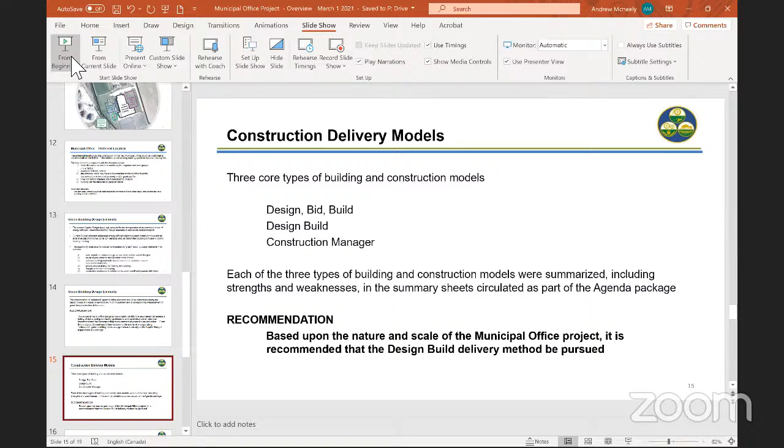All right, thank you, Madam Mayor, members of council. Tonight, I would like to walk through some aspects associated with the Municipal Civic project. This builds on the information that we shared in August of 2020 as part of our continuing review of options and their potential implications as a go-forward related to this initiative.

So to assist everybody, just from a bit of a context perspective, the history: the township used to occupy the space at 1171 Greenfield Road, and in the mid part of 2015, the administration was moved to the North Dumfries Community Complex. Staff presently occupy several meeting and programming rooms at the NDCC. We also occupy a portable that was purchased and is now located in the west parking lot.

Back in 2015, when the move was first announced to the NDCC, it was identified as an interim and temporary move to allow the township an opportunity to gauge its financial resources and to assess some options as it related to a future municipal office.

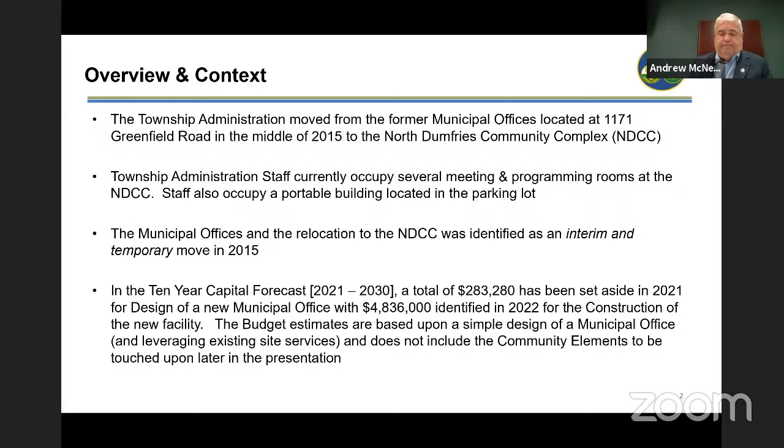Township today has a population of approximately 11,200 persons. By 2031, as set out in our official plan, the population for the township is proposed to increase to a size of approximately 16,000 persons.

So the Municipal Civic Center administrative space needs assessment, and the associated space allocation—in other words, how much square footage is required to accommodate administrative aspects—is based on the 2031 population as targeted in the township's official plan.

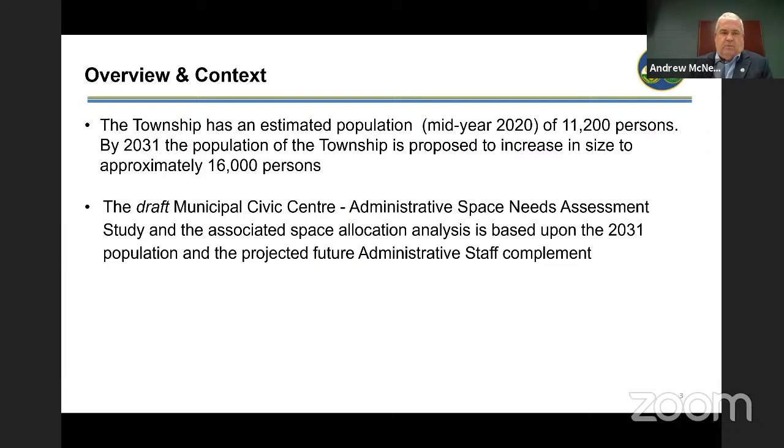Some of the key elements we're going to touch upon this evening: assessing or reviewing the alternative space allocation models, the incorporation of community space programming, the potential location for the siting of the new town hall and its fit within the overall campus of the property, green building components dealing with energy efficiency and lowering greenhouse gas emissions, alternative construction delivery models, public consultation and engagement process, and a suggested time schedule.

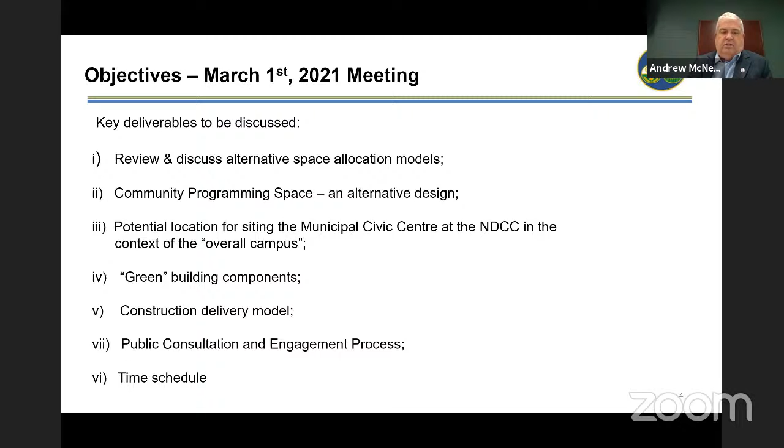So, focusing specifically on the space allocation model, circulated as background information with the agenda were two charts. The first chart looked at future needs based on staff positions in various departments and the assignment of space for each of those positions. The second page covered the back of house: washroom facilities, public washroom facilities, rooms, server room, storage space, and the like. All of these elements are broken out and listed.

And then at the sum, we have the gross up by 30%, which is the circulation in the common space for form, function, and fit activities in the building itself. So some key elements that are built into the model.

There would be a centralized customer service counter where all public-facing transactions would occur at this one-stop location. There is a dedicated office for the mayor, and there's a shared office with 2 workstations for the 4 ward councillors. The Dumfries Room, which exists in the western portion of the current NDCC, would continue to be utilized as a council chambers, a large meeting room, a training room for corporate purposes.

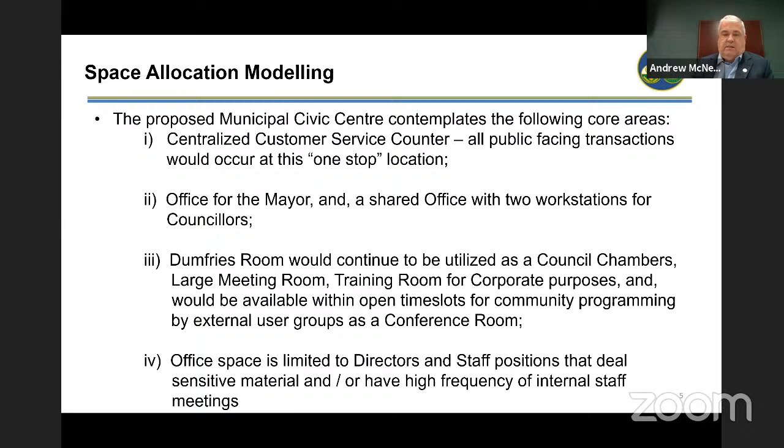The majority of the work areas for the administrative or technical staff are designed as workstations with centralized hydro, data, and telephone cabling that's dropped from the ceiling. So it's an open concept model, and the objective through this type of floor plan is multifold.

One is the overall cost of construction is somewhat lower because we don't have the demising of space with drywall partitions and doors. It also is a more simplified air conditioning, cooling network through the HVAC system, as we don't have to worry about as much confined space and the associated air exchange requirements under ASHRAE requirements.

The other benefit is it provides a lot of flexibility to create an adaptable floor plan over time. As technology or workflow patterns change in future years, having this open space allows us to readily change the footprint of the work areas more easily without having to worry about internal demolition of partition type walls.

There are 2 proposed meeting rooms, one at 6 persons, one at 12 persons in capacity, and 3 breakout rooms. Typically, these are to deal with either small internal meetings or people that come to the customer service counter when the nature of their conversation is perhaps sensitive, such as a taxation related matter, or the discussion is going to take a little bit longer than a normal transaction. This allows the discussion to occur in a smaller room where more privacy is afforded.

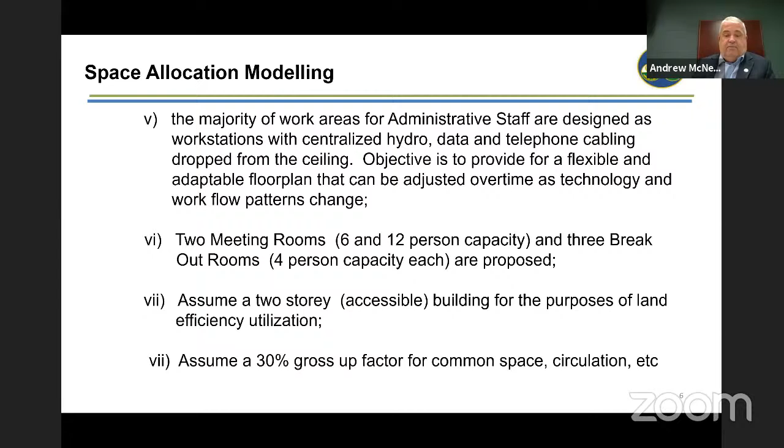We have assumed a 30% gross up factor for all common space and circulation areas. So we took the square footage for each of the business type activities noted in the space allocation model, and then gross it up by a factor of 30% to account for those common space elements.

So when we looked at the space allocation model, we also assessed what business areas of the corporation should be included in the town hall, and whether there were certain elements of the township's administration or technical staff that could be located in alternate space elsewhere in the building portfolio of the corporation. So the first area that was looked at was leisure and community services.

For the purposes of this discussion, we're just going to refer to it as recreation, and we're focusing specifically on the administrative staff. There is the option for administration staff within the recreation portfolio to occupy the current administration area that's adjacent to the front foyer or the main entrance at the NDCC. When the building was first constructed in 2011, this is where recreation admin staff did occupy, and it was intended over time that that would be the space they would occupy.

This allows for better interaction with visitors to the building who are here for leisure and recreation activities, and it puts those frontline staff closer to the users of the NDCC as we know it. This would also facilitate interactions after the township municipal office is closed, because generally the hours of the NDCC are between 16 and 18 hours in duration for most of the year on a 7-day-a-week business cycle.

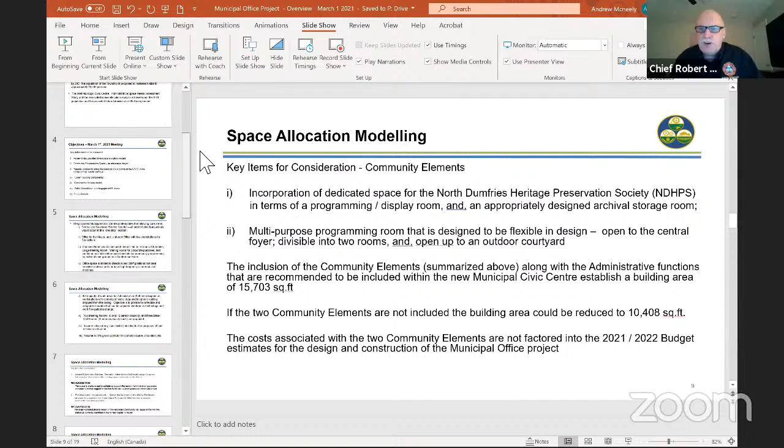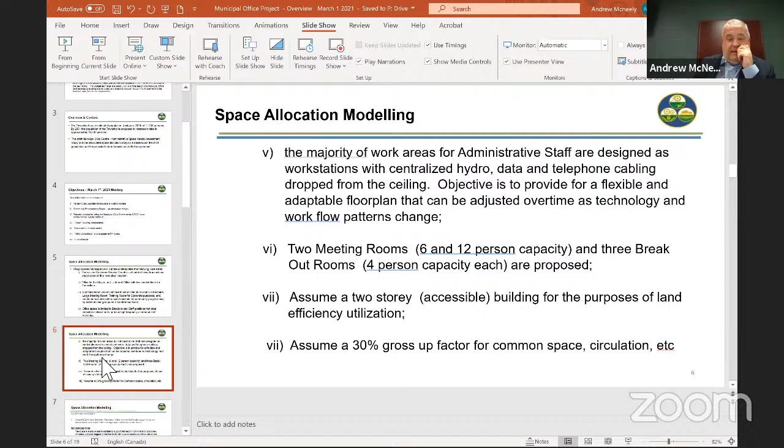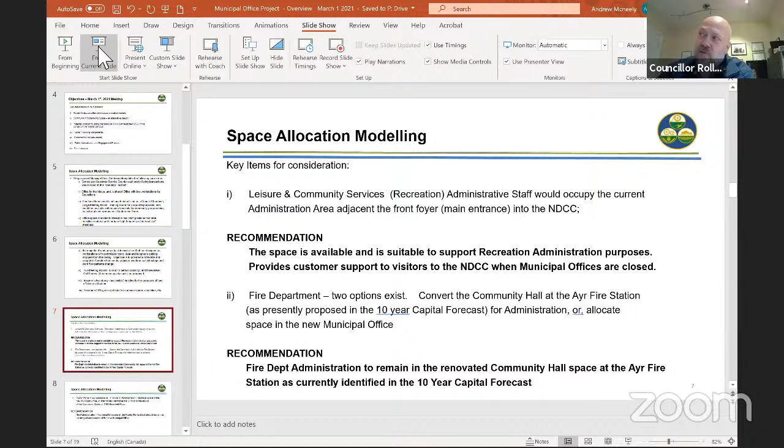Andrew, were you thinking of a space for councillors, like 2 councillors sharing one office, or one office that all 4 councillors could use when they need a meeting space?

So what was modeled was one larger office that had 2 workstations in it. And then there may be a small table with chairs where informal discussions could occur. There'd be a small library of materials relevant to the township.

Because sometimes members of the public want to meet with us, and in the past we've had to book the Dumfries room or something to meet at. So there would be the opportunity to reserve either the breakout room, one of the 3 breakout rooms, or the meeting rooms.

If there was a member of council already in the councillor office and you wish to have that discussion as a more confidential matter, you'd have that other option. Okay, thank you.

So then with PW, will we be building a smaller building down there on Greenfield Road if we move some of our staff into the new admin building? Yes, it would be slightly smaller because we wouldn't need either the meeting room location and/or additional dedicated office workstations.

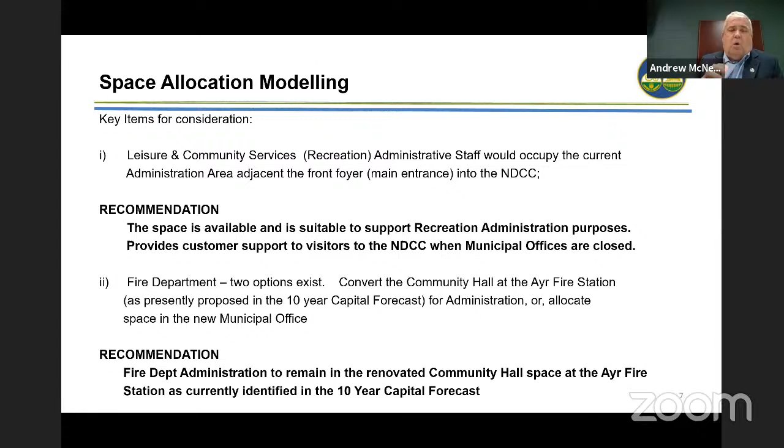The Public Works portfolio is divided into two different spheres of responsibility. We have our operations component, principally comprised of supervisory staff and operators who undertake the day-to-day maintenance of the township's linear infrastructure system. They presently operate out of the Works Depot at 1168 Greenfield Road. We presently have in the 10-year capital forecast a rebuild of key elements of the operations depot.

So the question is: do we move both the administrative and technical personnel associated with Public Works and combine them in one consolidated location at the operations center at 1168 Greenfield Road? Or does administration and technical staff continue to be located within the new municipal office project, with operations staff remaining centered at 1168 Greenfield? In terms of internal discussions, the ideal would be to keep the administration and technical staff at the town hall.

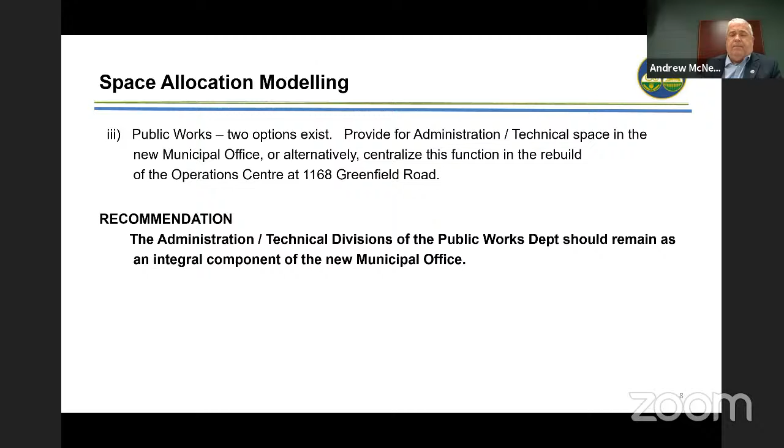This is largely to facilitate meetings with planning and building staff that may occur on development applications or building permit applications, but also to serve members of the public coming in for permits, documents, or general information. This allows technical staff from Public Works to have direct interaction with their peers and/or members of the public. So in this example, it's recommended that the appropriate space allocation be captured within the new municipal office project.

The discussion to date has focused principally on the space needed, or the components needed, to support the administration elements of a future town hall and services provided to residents and businesses of North Dumfries. There is the opportunity for Township Council, as part of considering what goes into the town hall, to incorporate some community elements focused on programming space to serve broader community interests.

Council may recall that approximately 2.5 years ago, a memorandum of understanding, an MOU, was negotiated with the North Dumfries Heritage Preservation Society. The MOU had a 5-year period, and we're halfway through its life. A key element spoke to the township exploring creation of programming and display areas for the Heritage Preservation Society. Today they use an office in the NDCC and a storage room for their archival materials and documents, but the space really isn't suitable or ideal for programming or display.

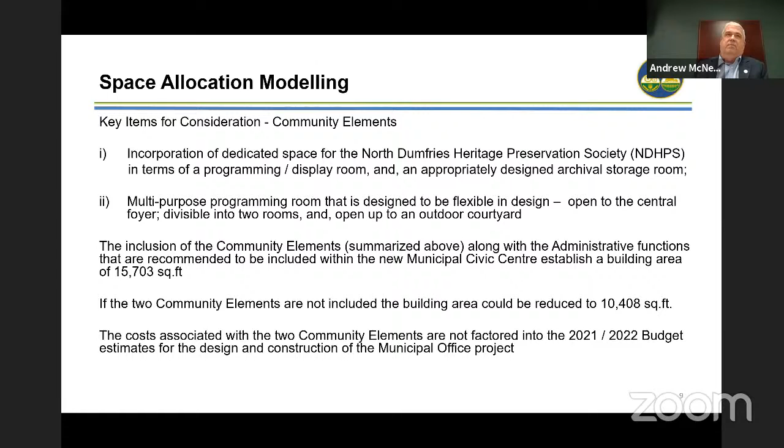It's also important for council to recognize that the two community elements I summarized a moment ago are not factored into the 21-22 budget estimates for the design of the municipal office project. So if one or both of these elements were to be incorporated, it would adjust the budget numbers that I shared with you at the outset of today's presentation.

So then there's the issue of where the building goes and how it fits into other opportunities that may avail themselves in the future, as it relates to potentially the twinning of the arena here at the NDCC or the provision of an indoor pool, as two other representative build type projects. Council may recall that in August we identified 3 candidate sites here at the NDCC related to potential locations for the new town hall. Each had its own strengths and weaknesses.

But for today's discussion, I wanted to show you what the implications are of these future buildings, and how the town hall itself could be accommodated without impairing those two other projects if they are to proceed in the fullness of time. So for the purposes of the discussion, the arena as a twin would have an 85 by 200 foot ice surface.

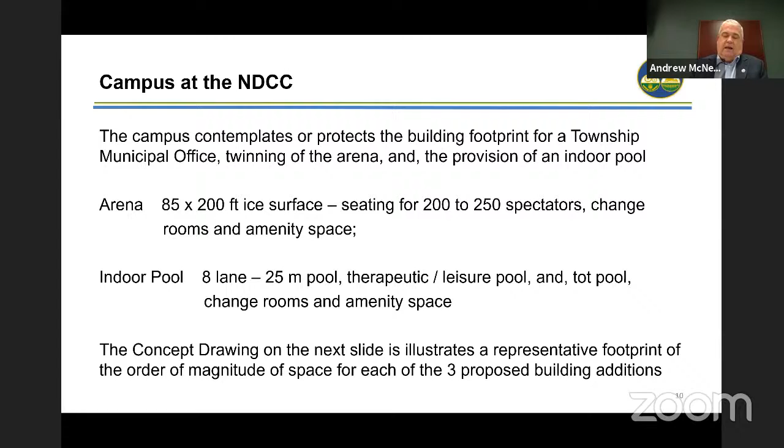It would have seating capacity of between 200 and 250 spectators, with appropriate change rooms and amenity space to make that function area effective and support ice usage. The indoor pool, as spatially shown in the concept plan, is an 8-lane, 25-meter pool. It also has a standalone therapeutic or leisure pool, as well as a standalone tot pool. Commensurate with the aquatic space, there'd be appropriate change rooms for male, female, and family, as well as the supervisor's area and support space for both storage and aquatics staff.

So this is the concept drawing I'm sharing with you, and I'll put my cursor over it. Outlined here in black is the existing footprint of the North Dumfries Community Complex, including the North Dumfries Community Health Center, the warm side made up of McNeil Hall and the MPR space, and then the arena bowl walking track in this more northern portion of the NDCC.

Outlined here in purple, to the east and physically abutting along a common wall, is the proposed twin pad arena with the 85 by 200 foot ice surface that I mentioned a moment ago.

If I move to the west elevation now, this is the Dumfries room and the seniors lounge, to give everyone some context. There would be an extension from the existing vestibule area at the west approach to the NDCC. There'd be a new building link, and then this would be the new proposed municipal office. What's shown here is an 8,000 square foot pad.

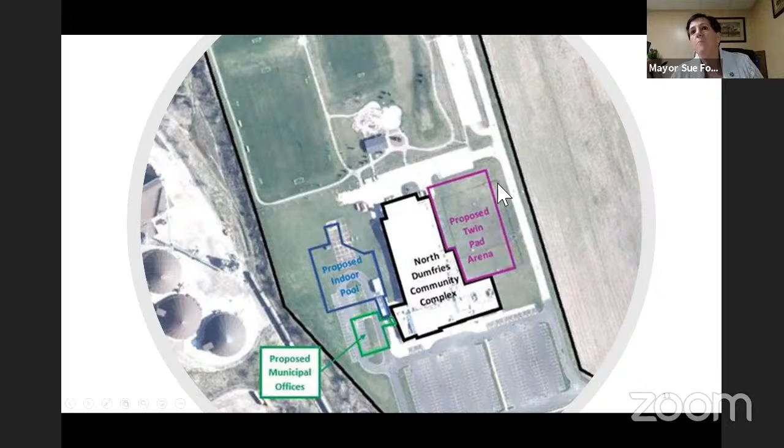Parking is a concern for me, because we lose a lot of the parking where the seniors area is now. And as you're well aware, we've now gone up to junior B. When we had junior C games, the playoffs, there was no parking to be had as it is right now. My question to you is, do you see the most easterly side of the proposed twin pad, that land there between the roadway, can that be turned into parking?

Yes, so you can provide parking located along the east edge of the building. If you wished, this space could be additional parking. There's parking that can be added back here. This is inefficiently laid out, including this grass strip is deep enough to add parking. Along the west flank here, additional parking can be added. So depending upon your building scheme, the timing of the various builds, you could add additional parking as required.

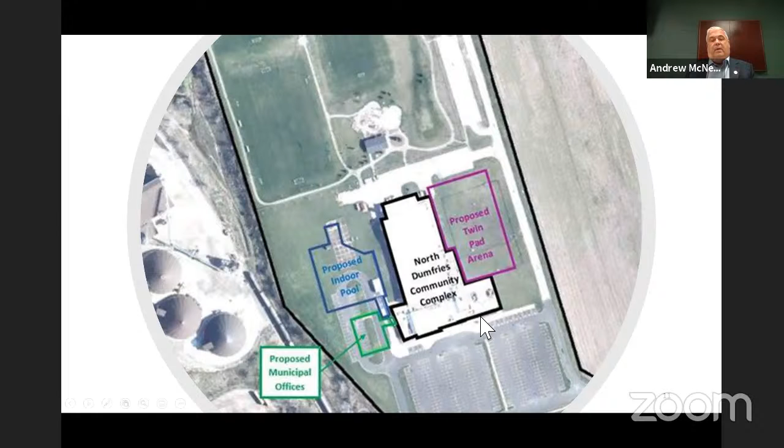So the preferred location for the municipal office, having an understanding of protecting a footprint for one or more future buildings that might occur in time at the campus, staff are recommending that we look at the west side of the NDCC. Council may recall in August we did identify 2 other locations. The problem with the other locations, the one out in front of the main entry would have significant impacts on current activities and the ability for users and the public to access the building during the construction time period, and would significantly have driven up construction costs to safely negotiate people through a partially constructed building to access the interior of the NDCC.

The other option is the green space to the east of the current North Dumfries Community Health Center. Those lands may afford other opportunities that are yet to be known, and allow for even further grouping of buildings and synergies between the health type activities associated with the North Dumfries Community Health Center, the recreation and leisure programming opportunities here at the balance of the NDCC and Cowan Park. So to provide ultimate flexibility, it would be nice to protect those lands for a high order activity that might unveil itself in the future.

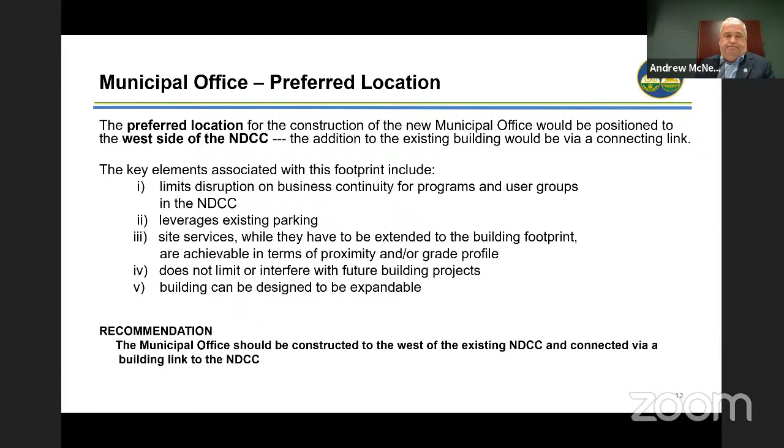Green energy, green building, environmental efficiencies. The current capital budget does not account for an extensive range of energy efficient or alternative building design elements that are designed to reduce the carbon footprint.

The current budget does account for things like energy efficient lighting, tinted windows, and an extensive utilization of windows to bring as much natural light as possible into the building to reduce the need for lighting. The tinting is meant during these hot summer days to reduce the heat from that lighting, which would drive up air conditioning type costs.

The use of zone light sensors. So if an area is not occupied or is a low occupancy area, the lights would automatically either dim or shut off. And as a person moves into that area, it either trips on by motion, and you can set your sensors to increase the intensity of light based on the time of year or time of day, as the case may be.

And then there's the building automated software, which controls heating and cooling, where you can put in programmable thermostats, and you can control when heating or cooling is activated based on not only temperature thresholds, but time of day, day of week, or time of season.

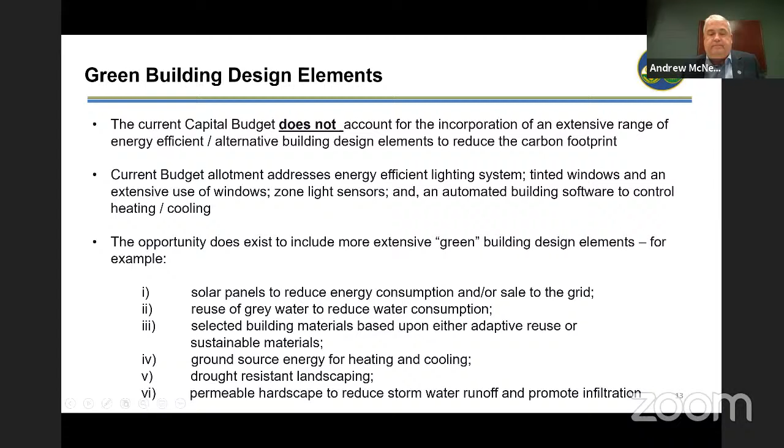He's gone. Yep, just give him a minute. CEO McNeely, we lost a lot of that. We got down to, I'm just logging back on. Okay. I think he's frozen again. There he goes. Okay. So CEO McNeely, we got down to, I believe bullet 3 or bullet 4. Nope, he's frozen again, I think. Nope, there he is. And you're muted, CEO McNeely?

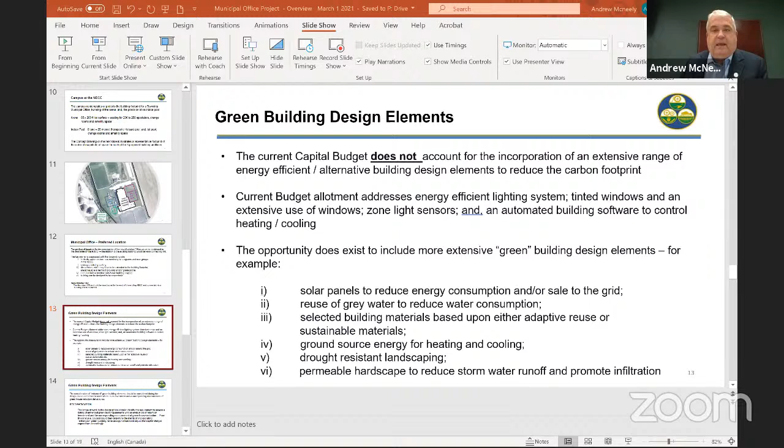Okay, members of council, can you hear me? Yes, thank you. All right, so can you continue to see my screen? Yes. Okay, I just have to get my screen up so I can see it. I can do the screen share if you want, sir. Shelley, is he frozen again? I think so. It's an interesting internet night. Yes, I think it has to do with the power. So I am going to do the screen share for him and maybe he will restart. No, we don't have him back yet. So that's the right page.

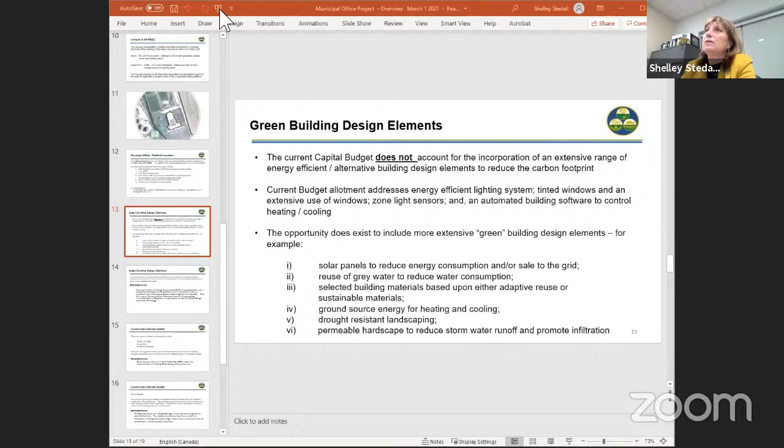Okay, so you can see the PowerPoint. Yeah. We can get it to go like this. We're just talking about the...

Green building design elements and some of the ways that there could be future savings. There could be additional costs up front with some of these elements when you initially put them in, but then over time there's savings. We've seen that with the hydro in the lights. When we changed the street lights, we had a huge upfront cost, but over time, I think it was $100,000 and was repaid within 4 years. So these ones could be similar to that.

Do you think you can handle going forward, Ms. Stedall? I believe CEO McNeely's back. I'm screen sharing. Madam Mayor, members of council, can you hear me? Yes, we can.

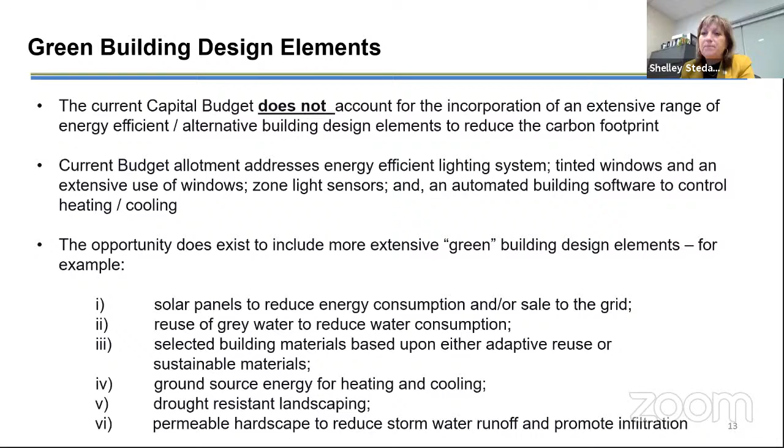And I'm screen sharing, Andrew. So I am where you left off with the permeable hardscape to reduce storm. Talking about green building? Correct.

So I was talking about gray water. I talked about harvesting water from the roof and how it could be utilized, but we can also take the wastewater from sinks and taps and utilize that water, either recycled back into the actual toilets and or discharged outside and used as part of that irrigation system or technology I talked about related to the roof.

Building materials, whether it be adaptive reuse—in other words, we repurpose spent materials and use them as either primary or finished materials within the building—and or certain types of building materials that have a low impact on the environment. It has great opportunity for us.

Where we would drill a supply well, and it would be topped up for heating in the winter, and would augment air conditioning during the summer. Essentially it reduces the shifts of heating and cooling in the seasons and lowers your overall energy bill, and from a perspective of carbon emissions, it reduces our reliance on natural gas to heat or cool.

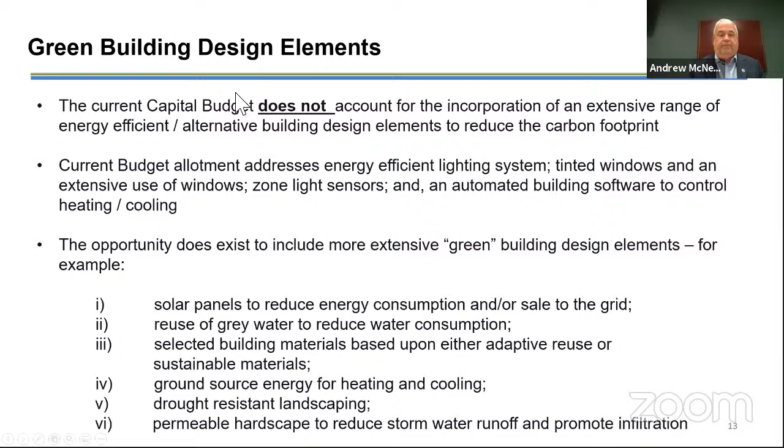So Shelley, can you move to the next slide, please? So what we're basically saying is there are merits at looking at technologies and opportunities. We would outline these elements, and as part of the review of the building, there would be not only scoping out the type of work, but then it would be tested in terms of its return on investment.

I'll use an example: if we look at the ground source heat system, that might have a large one-time capital cost. However, through reduced energy consumption, it may have a payback period of 6 or 7 years, and after that we're in a positive trend. So you'd look at it from the perspective of measurement of greenhouse reduction, or GHG emissions, and return on investment as it affects future operating budgets, and a reasonable payback timeline for that initial investment.

So the recommendation is there are merits—we should do that work, but as we understand what's going into the building and how the building is going to be designed, these elements can be better truthed out, and that analysis can occur. Then based on that assessment, council can determine whether to add monies to the budget to incorporate one or more of those enhanced green building technologies or systems. Shelley, do you mind moving to the next page, please?

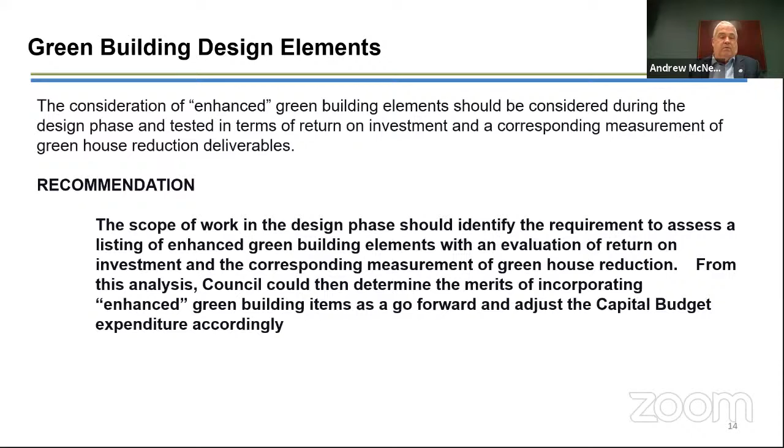So, delivery models. There are many variations and permutations. There are 3 core types of building construction: design-bid-build, design-build, and construction manager.

I shared with you previously, as part of the information package, a discussion paper that evaluated and summarized each of the characteristics of these 3 models, as well as the advantages, disadvantages.

Ashley, you and I aren't frozen. Are the others frozen? Advantages of each of these models.

Viewing that background paper—that's where in design-bid-build, you prepare a tender package, and they're responsible to build based on those construction drawings. That's how the NDCC was conceived back in the 2009-2011 time period. Okay, that's a fairly common approach.

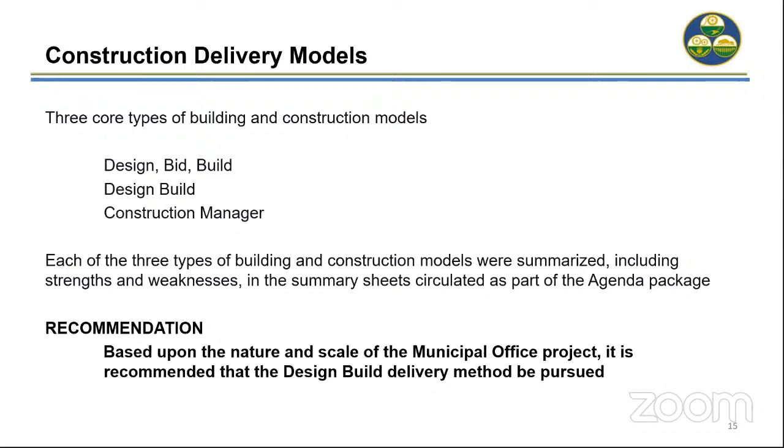Companion with the construction component, and regardless of which construction delivery model council ultimately picks, staff are strongly recommending that a project manager be retained. Project oversight, construction oversight is critical.

This is going to be a time-consuming exercise. We do not have the internal capacity to provide the dedicated time to ensure that the project keeps meeting all of its milestones and to turn information around in a timely manner.

A project manager is basically the township's representative and would represent the principal contact on a day-to-day basis. At key points, obviously, the project manager would be tying in with township staff or a building steering committee that may be struck to oversee this project. But the day-to-day liaison and assessment of progress on different tasks would be the responsibility of the project manager.

The project manager would also troubleshoot issues before they become a problem and cause delay or potential cost overruns, as well as would, on behalf of the owner, prepare strategies or options for us to consider as alternatives. So you're always trying to be in front of issues as they arise.

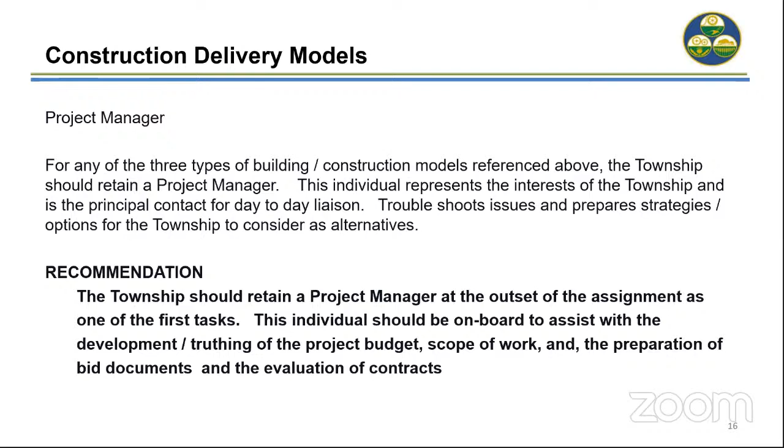So public engagement and consultation. Depending upon what goes into the building would likely drive how robust and extensive that public consultation and engagement would be. Regardless, there needs to be public engagement and consultation.

This is ultimately public funds being used in a future public building. And so everyone needs to understand the scope of the project and have the ability to share in the future composition of what this building looks like.

The more community public space, programming space that's incorporated into the building would extend and increase the amount of public engagement and public consultation to make sure that those public programming spaces ultimately serve and reflect the needs and interests of a wide variety of public user groups that may use that space.

The public consultation engagement process can be fairly varied depending upon what goes into this building, and how it's delivered. Obviously, we're in the COVID world right now and a lot's being done virtually, as we've seen tonight. That has its inherent problems. However, for the foreseeable future, we know that in-person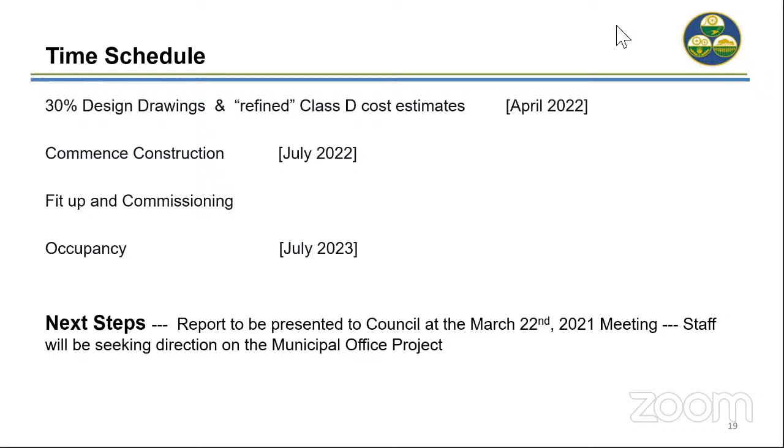So, Madam Mayor, available to answer any questions that members of council may have on one or more of the elements that have been touched upon as tonight's walkthrough.

Councilors. Councilor Rossner, Councilor Rollman next.

I'm looking at the design of all the buildings there at the NDCC, and I'm still wondering whether the Township Hall should be up there at a final location. I'm thinking that there might be another alternative that would better suit having Township Hall, and leaving our sports facility just as that, leaving room for future sports facilities, including space for the twin pad, maybe the realignment of a possible future pool, and not losing the community gardens or the space off to the west side. So I'm thinking there might be another option for us to look at.

Any specific space? Well, the ACC for one. Okay, so add, all right. Councillor Bowman, or did you want to respond, CEO McNeely?

So staff did look at the ACC four years ago or so. The building is problematic in terms of making it suitable for administrative space, and circulation. If we use the main level, underneath the community hall, you've got a very low ceiling at that location, and it's difficult to incorporate HVAC systems and natural light into the building. The other option is you'd have to have a significant addition on that lower level. If we were to expand and use both levels, we would significantly interfere with the current community hall and the space it provides for programming area.